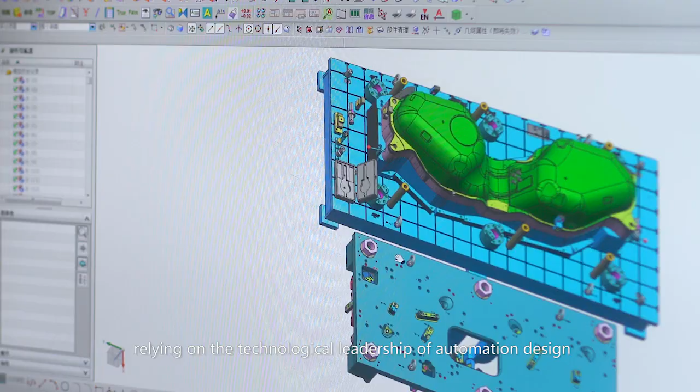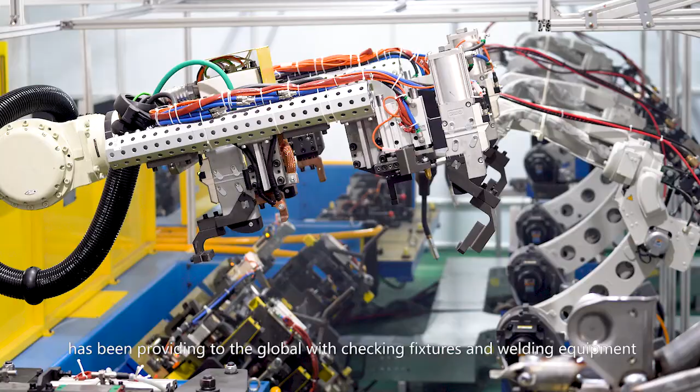Dongguan Mission Gauge and Fixture Company Limited, since its establishment, relying on the technological leadership of automation design, high-precision manufacturing, and the concept of only fitting, no assembling, with rich project management experience, has been providing checking fixtures and welding equipment to the global market. The spirit of technology leading and quality brand together establishes industry influence.

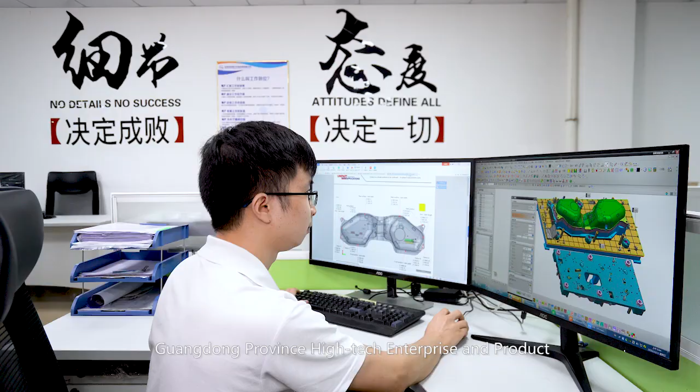Dongguan Mission Gauge and Fixture Company Limited, Mission Gauge and Fixture, has won the title of Guangdong Province High-Tech Enterprise and Product, has ISO 9001 certificates and more than 50 Chinese national patents.

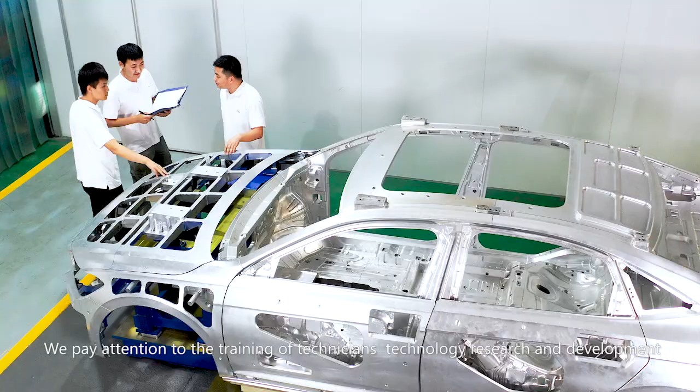We pay attention to the training of technicians and technology research and development, realizing automatic design and automatic drawing, and our efficiency increases by more than 20%.

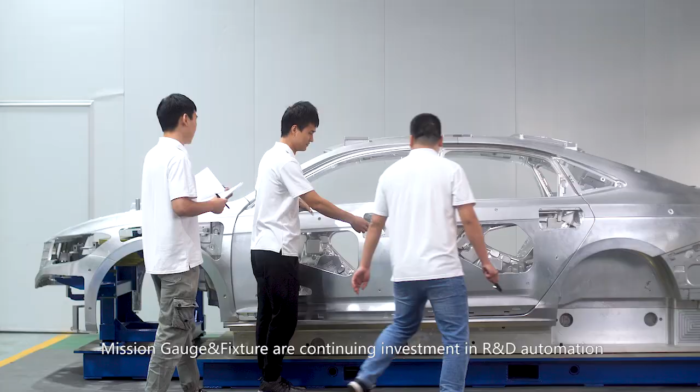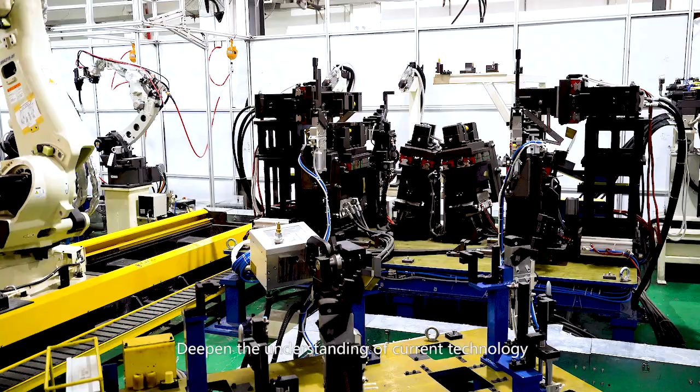At the same time, Mission Gauge and Fixture continue investment in R&D automation to keep learning the current and future needs of OEM manufacturers, deepen the understanding of current technology, and meet the growing expectations of customers through excellent engineering technology and overall solutions, advanced machining equipment, reasonable craftsmanship, and strict quality control.

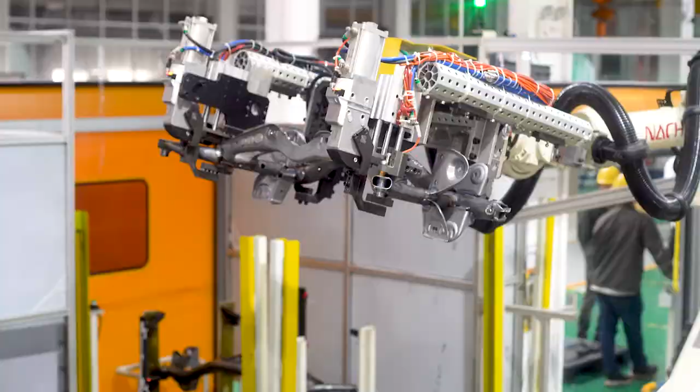Strictly control every production procedure, do once and do it right. It is the biggest delivery guarantee for Mission Gauge.

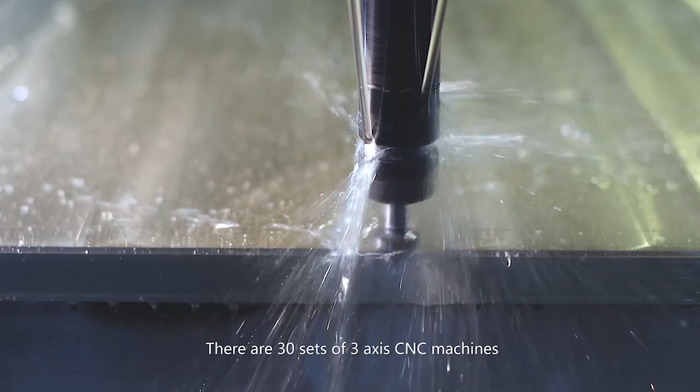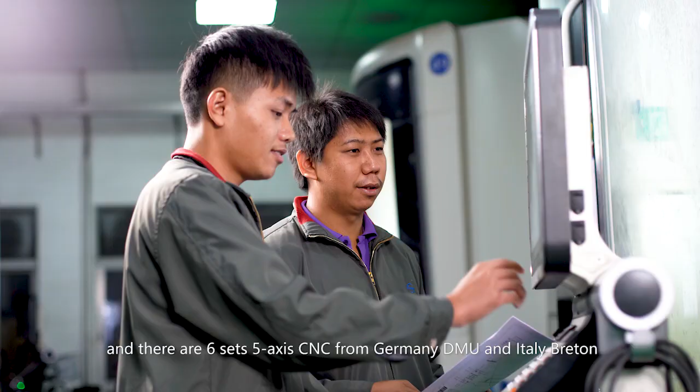There are 30 sets of 3-axis CNC machines and 4 sets of gantry machining centers with max machining scope of 6 meters, and there are 6 sets of 5-axis CNC from Germany's DMU and Italy's Breton, with auto-programming software, meeting the high-precision processing requirements of various large-sized special curved workpieces.

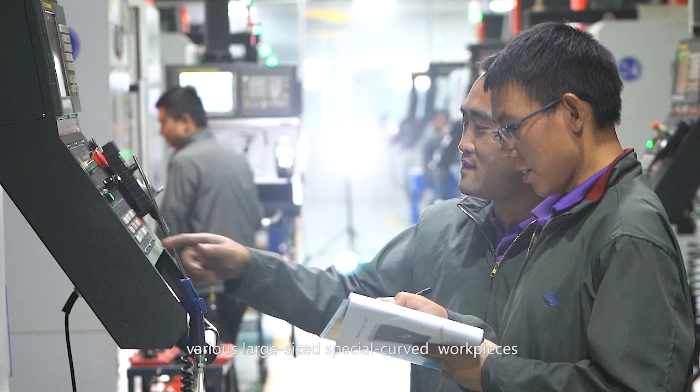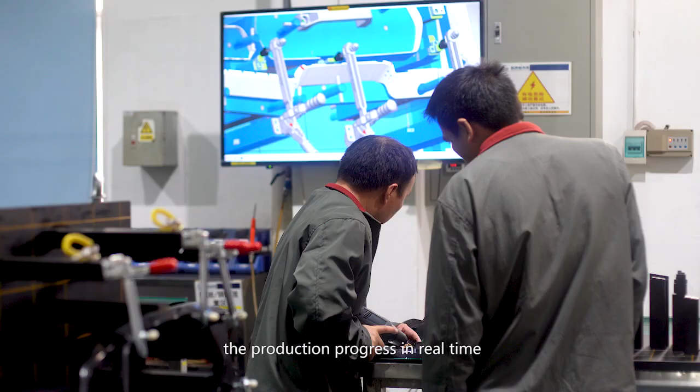At the same time, we introduced SAP and EMAN management systems to control the production progress in real time, high efficiency, smart manufacturing, all in Mission, technology leading and quality brand, fully in Mission.

Punctual delivery and efficient operation highlights core competitiveness.

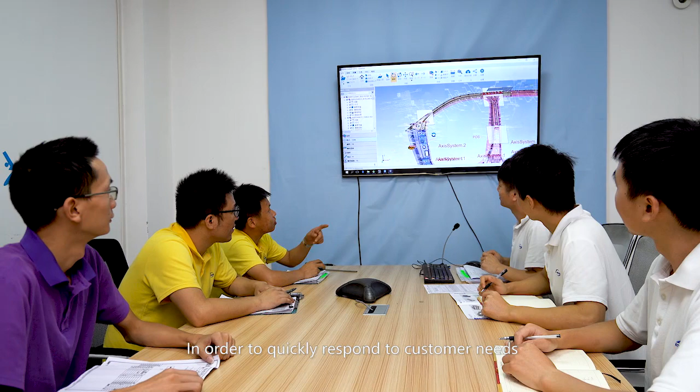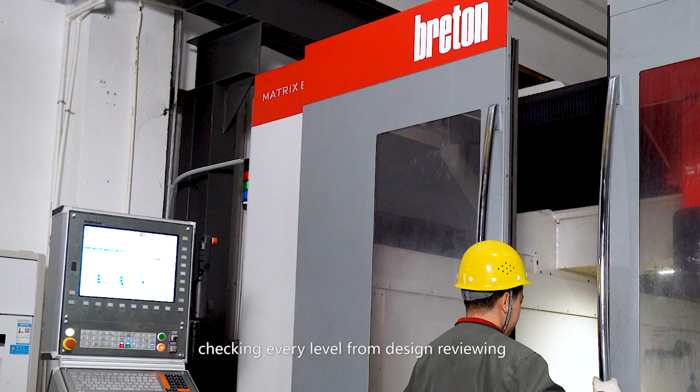In order to quickly respond to customer needs, Mission Gauge and Fixture has established a professional project team with technician background and bilingual capabilities. They are proactive and result-oriented, keeping improving the products and services, checking every level from design reviewing, manufacturing and processing to customer acceptance.

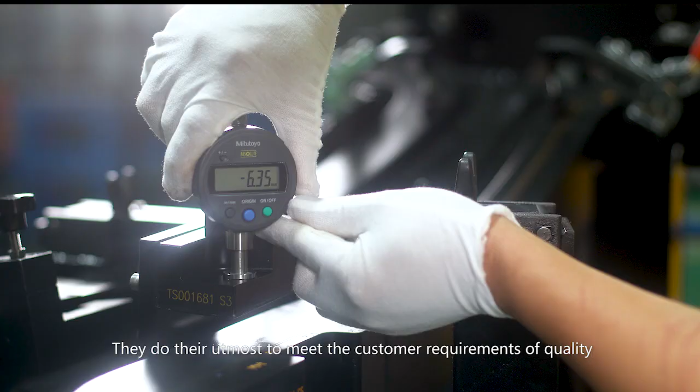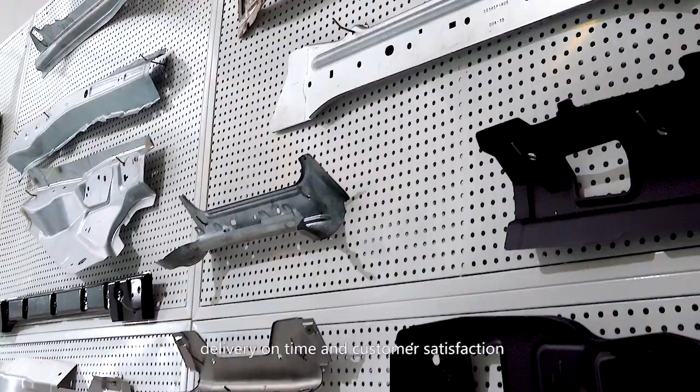They put parallel management in place in advance, so all precautions can be taken. They do their utmost to meet customer requirements of quality, delivery and service, add value, and realize the commitment of quality first, delivery on time, and customer satisfaction.

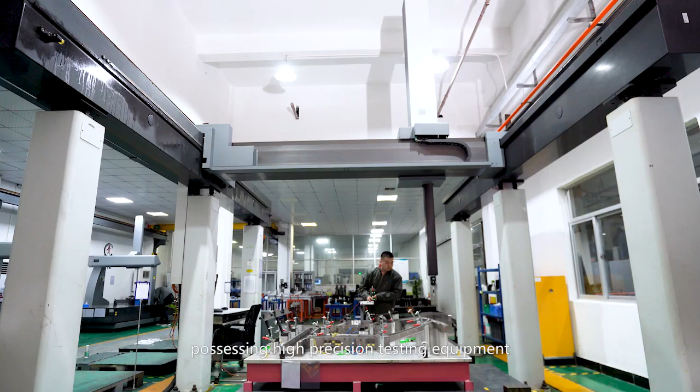Mission has obtained ISO 17025 laboratory accreditation, possessing high-precision testing equipment and a 3R quality management system with all-system, all-process and all-employee participation, standardization, digitization, making improvement bit by bit.

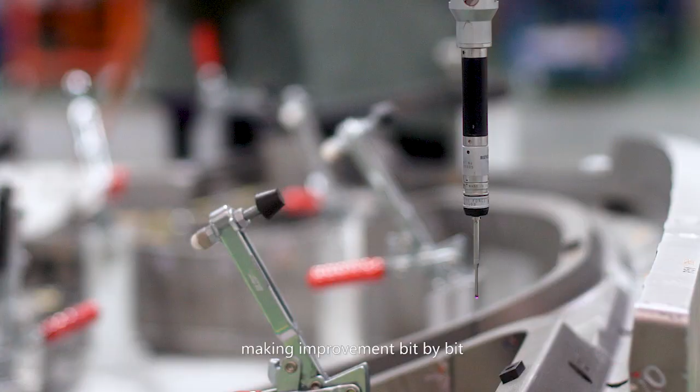Mission Gauge will keep improving and never stop. Customer first and people-oriented thinking continues the leadership of the enterprise.

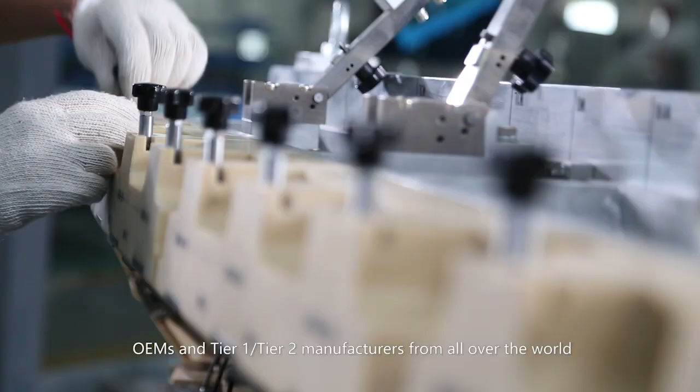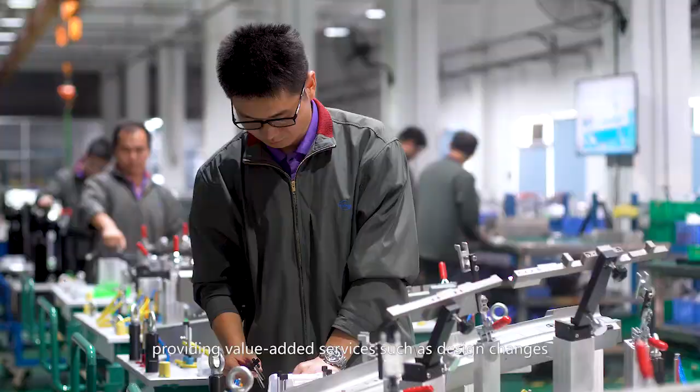Since 2008, Mission has been providing checking fixtures and welding jigs to OEMs and Tier 1, Tier 2 manufacturers from all over the world. Mission partners cover all regions of China, and with after-sales service centers in Europe, the United States, Canada, and Mexico, providing value-added services such as design changes and after-sales services for global customers. Supreme and sincere quality reflects the extension of development space.

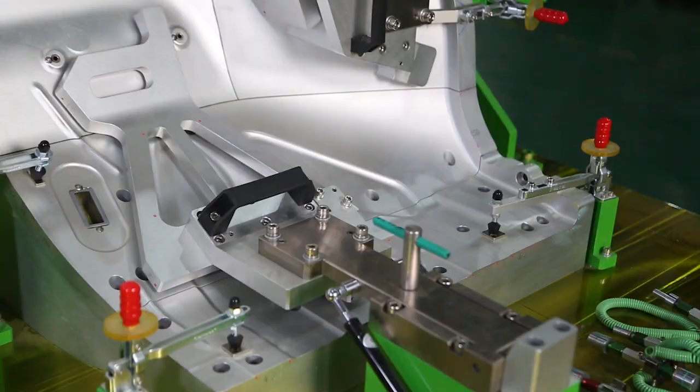Mission Gauge has stepped into the track with international standards, showing unlimited development space, high-quality products, well received feedback.

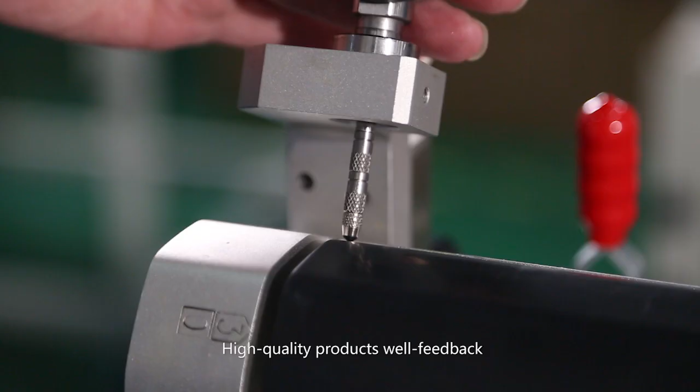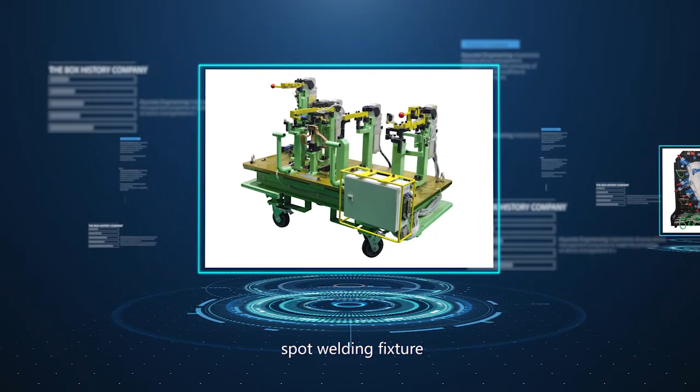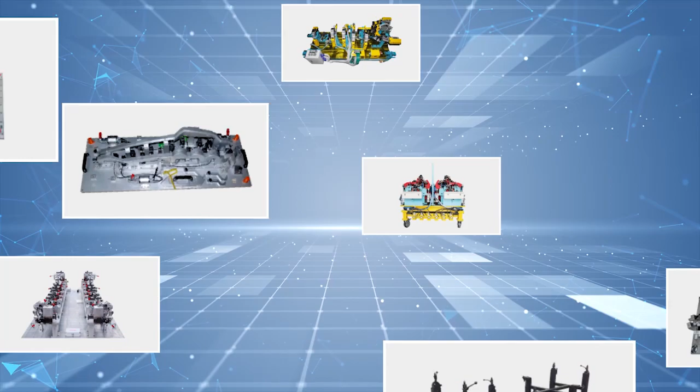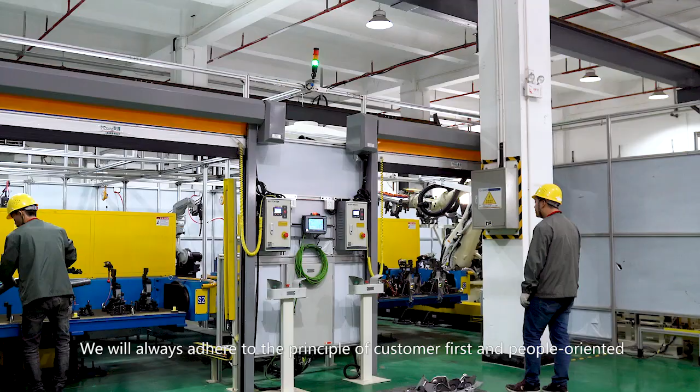Looking forward to the future, we Mission people promise we will always adhere to the principle of customer first and people-oriented. Treat every customer and supplier with integrity, and strive to achieve creating a first-class enterprise and achieving a positive life.